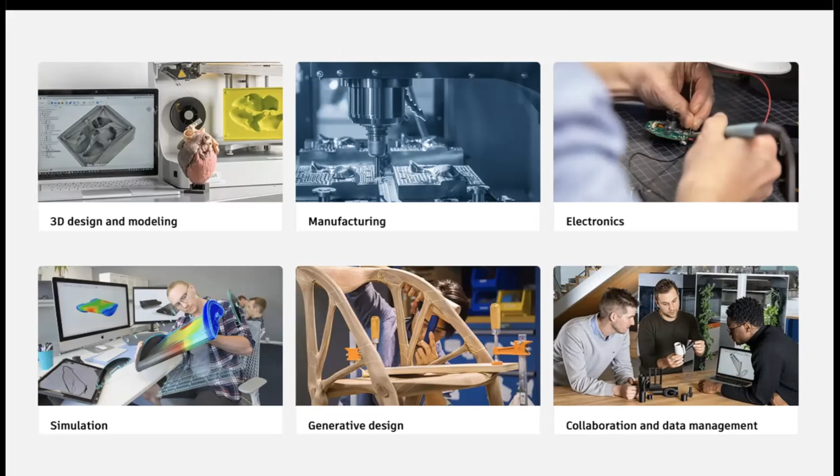And as we learned in our last webinar, you can even render, animate, and create 3D graphics that look hyper realistic. It's a really diverse program that allows students to do what's happening across industry, whether as an animator, creator, or model maker, bringing those resources into the classroom to let them engage with all of this in just one program. It really gives us a lot of options.

And what that means is your students can push their ideas into the real world. With all of these different tools at their disposal, their designs can really come to life, from circuit boards to 3D modeling, 3D printing, CNC milling, animations and graphics. It's a very diverse way for students to be creating, and I find personally as an educator that it really engages with a wide range of students, which is really cool.

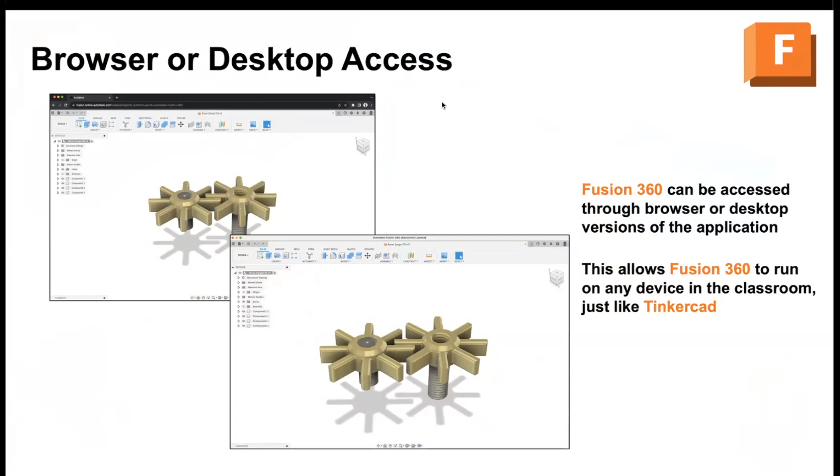Now, Fusion is accessible in two different ways. You can access it via a web-based app on pretty much any device, loading it in the web browser kind of like you would do with Tinkercad. Or you can also use it offline using a desktop app for Windows or Mac computers, which is really nice. So it's super accessible for students in whatever your classroom environment might look like.

To use Fusion, it is completely free for students and educators, but to gain access to it, you do need to create a free Autodesk account. Depending on where you are in the world, the age requirement for students might be different - usually 13 years old in the US, and that varies a bit based on your region. But creating accounts is completely free, and it gives all the premium and paid-for features to you for free, so your students can engage with the professional features that real designers and pros might be using in industry, right in the classroom.

There's also something called Fusion Teams, and this is kind of like making a class in Tinkercad where you can create a team, invite your students to it, and that's where they might share their work or submit work to a project that you could create. This is where students can share work between group members and collaborate on their designs. So this is a really great way that students and you can interact - you can see their designs and provide feedback, which is super cool as you look at their projects.

And I also just want to point out, especially if you're new to Fusion, that Fusion is infinitely customizable. You can change all the menus, all the ways you navigate. If you look at my Fusion screen later on, when I start projecting and sharing my screen, you might notice that my toolbar is different than yours. That's just because I've customized my tools and put things where I want them to be, and I'll show you how to do that when we dive in.

But if you're coming from Tinkercad, which I know so many educators and students are, I recommend that you go into the menu for Fusion, and you can even adjust the navigation tools like the mouse wheel, how you scroll, how you zoom, how you select things. You can make it mimic Tinkercad, so that students used to navigating Tinkercad can make Fusion feel more comfortable, which is a more intuitive and easy way to learn. Even as an educator, on the first day of introducing Fusion, I might set up our toolbar with the tools I know they'll be using, adjusting things to suit what we're doing in class so students can engage more successfully. The link for doing some of these things was just dropped in the chat for you to take a look at.

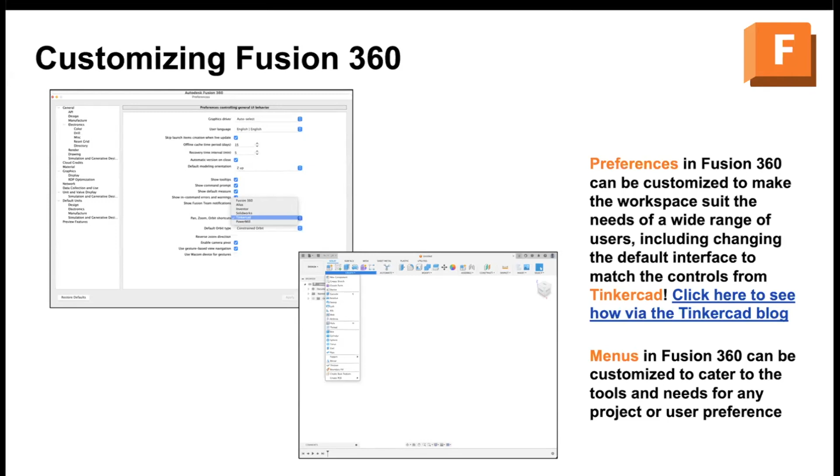So let's cover the basics, now specifically getting into tonight's topic about getting started with CNC. There are so many different things you can do, and this is such a wide topic that realistically in our time tonight we can only start to scratch the surface. My goal is for you to get a general understanding of what it is, the types of projects you might be doing with your students, the types of resources you might have or need, and of course how to use Fusion 360 to do these things.

So the first is let's cover some key terms: CAD versus CAM. CAD stands for computer aided design, and that's software focusing on the design of the product or part - what does it look like, how does it work. CAM stands for computer aided manufacturing, which focuses on manufacturing the product - how the part is actually made. Now, there are programs that are exclusively CAD.

For example, you can see I have some little icons here. Tinkercad is a CAD program where you design things, and Autodesk Inventor is another program in our suite where you would design things. Then there are programs that are CAM, where you take your design and prepare it for manufacturing. Fusion, as you can see, actually does both. We've covered this in previous webinars, and we have a link to get to all of our webinars and things like that.

On how to design in Fusion - we covered CAD and designing and things like that, and tonight we're really focusing on the CAM piece. How do you take your designs and bring them to life? There are some programs out there that are exclusively CAM, but one of Fusion's biggest benefits is that it's a one-stop shop where your students can do the entire design and production process in a single program.

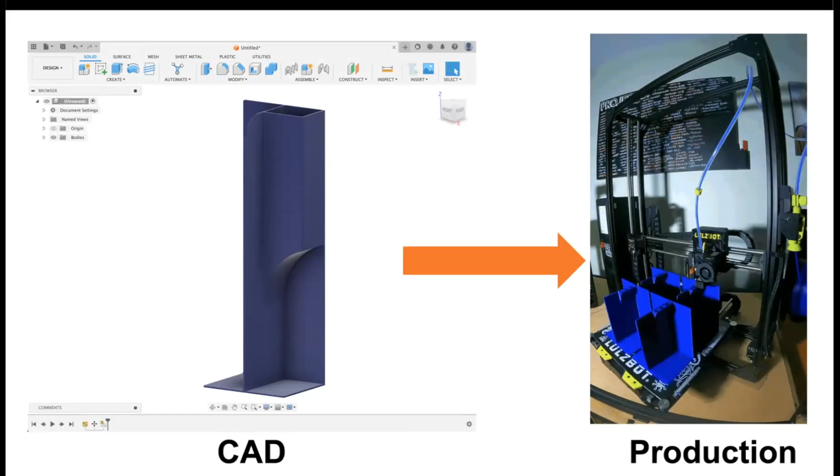The reason being, my 3D printer needs to know what is the quality. How quickly do I want to print this? What is the layer height, for example? How smooth do I want these parts to be? What material am I going to use? What plastic is this going to be in? What temperatures does it have to be at? I need to set all of those settings, and that is exactly what's done in CAM.

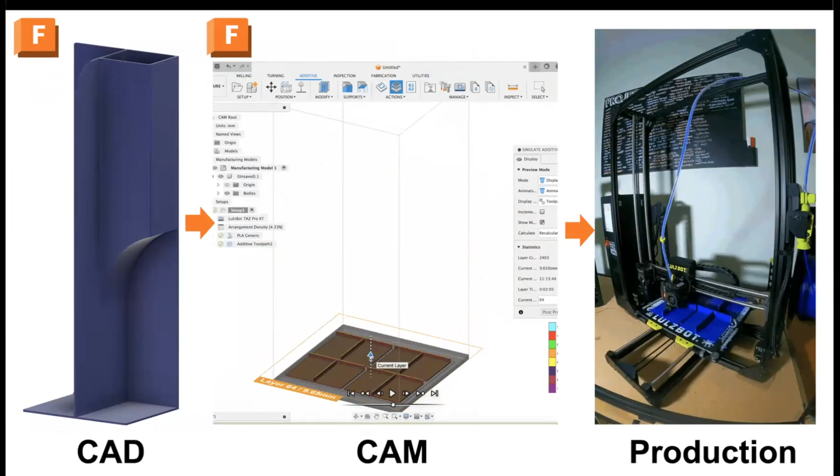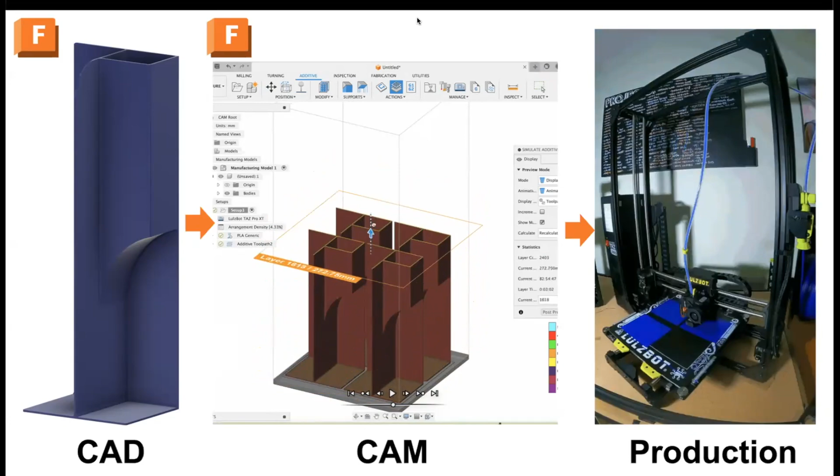So first I design something in CAD, then I drop it into CAM, and this is all happening in Fusion, in the same place. We did talk about this in a previous webinar called 3D Print Better, which you can go back and see if you're interested in learning more about the 3D printing world. In the CAM piece, that's where I say I'm using this plastic, I'm doing this quality, and then I send that file, usually a G-code or coded file, to my machine. In this case we're talking specifically about 3D printing, but the concept is pretty universal for any type of computer-based manufacturing, which we're going to talk a lot about tonight as we talk more about CNCs.

So that's where CAM comes into play. There's a lot of different types of manufacturing processes. 3D printers fall into the additive process group, where we are adding material. You start with nothing, and we're either melting a roll of filament, like in fused filament fabrication, or there's other types of 3D printers that use liquid resin, which actually uses a laser to harden the resin. We're adding material to create a model.

Another type of manufacturing process, more commonly associated with CNC production, is subtractive manufacturing, where you put in a block of material and then some type of cutting process - drilling, cutting, whatever it might be - will actually remove material. It machines it away and then creates your final parts. You can get very similar parts, arguably, depending on your machines, but the way the parts are made is kind of inverse - they're completely different.

Then there's a third type of process group, formative, where you might have a mold, pour hot plastic into it, remove the mold, and then you'd have your part. That is how most of our products that we buy are created. But additive and subtractive are not only used in industry, they're also still widely used in the prototyping method. For example, if I was going to mass produce something, I might use a formative method, but before I mass produce it and make my mold, I'm probably using additive or subtractive to make prototypes. I do want to point out that there are plenty of products actually made using purely additive and subtractive as well as formative.

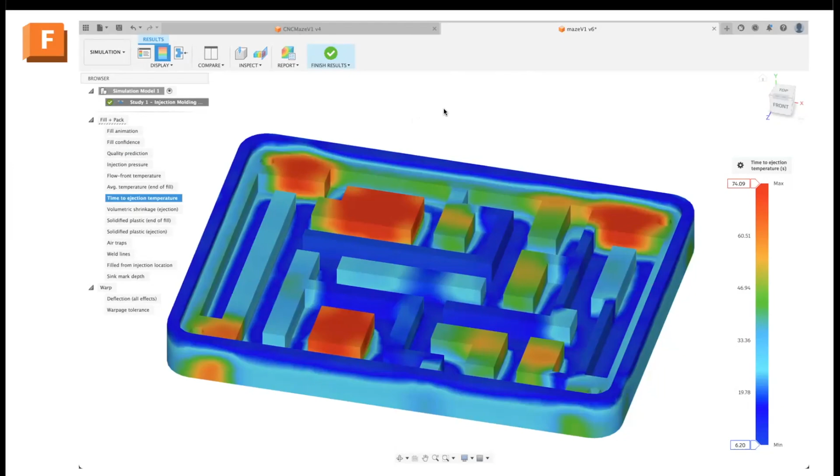So one program lets you work with all three of these typical manufacturing process groups. While we're not talking about all three tonight, it's important to know that they connect and relate. What we are talking about is CNC.

CNC stands for Computer Numerical Control. Essentially it's a machine whose movements are controlled by a computer process, usually some type of coded file, and that coded file is typically called G-code, the language it's written in. Way back in the day, people used to write this by hand, and you still can if you want to give it a go.

But CAM software will generate G-code for you based on the parameters you set. And CNC is really broad.

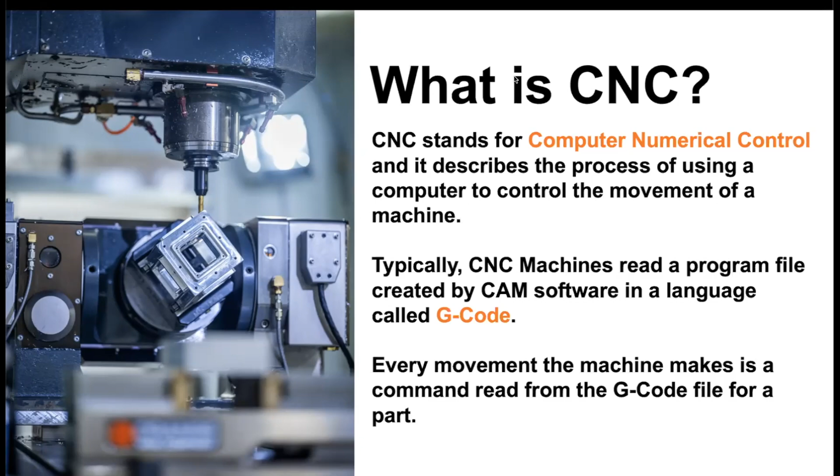However, it typically refers to these types of machines. So when somebody says I'm working with a CNC, they're usually talking about either a mill or a router, which uses a drilling process, or a drill bit spindle-like thing, that's used to carve away material. I'll be showing you visuals in a moment.

They might be referring to a lathe, which is a turning center, where something is rotating on a continuous axis, and then a blade is carving it away to make very symmetrical, cylindrical designs. Or there might be cutting machines like a laser cutter, a water jet cutter, or a plasma cutter.

These are usually the most common CNCs, but I want to make it super clear there are many more. 3D printers are technically classified as CNC machines, not that we usually refer to them as them, but they are. They run on G-code and computer numeric control, just like these machines. There's also a bunch of others used in industry like EDM machines and many other types of processes, but these are usually the most common when we say the word CNC.

Now, the first important tip before we dive into the design is to get to know the capabilities of the machine that you have. As a designer, and as you're teaching your students to design to be successful with CNC production, and right now I'm talking mostly about subtractive manufacturing with a milling or lathe or turning process, whatever it might be, we need to know what our machine can do.

So I might have this design, a very simple block with a little J on top, like an extruded J. Before I go to manufacture this, I need to consider the size of this model, the detail or resolution, like how sharp are my corners, how fine a detail am I trying to create, and what material. Do I want to make this out of wood? Do I want to make this out of metal? Does my machine have the capability to do that?

If I have a very small CNC mill, I know I can't put in a large sheet of plywood. And if my mill doesn't have, maybe, coolant or a spindle that can handle it, I might not be able to make this out of aluminum. So knowing those things and designing around those constraints about what your machine can do is important to understand as you want to become a more successful designer before we dive into the CAM process.

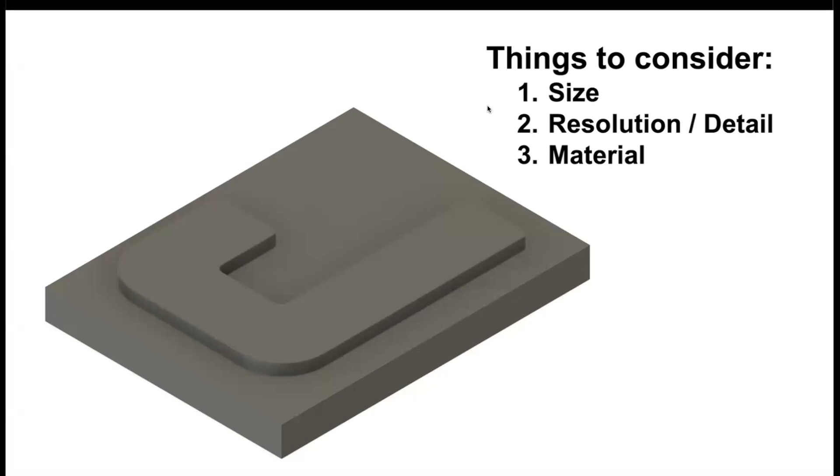But let's say that I set all these things correctly and I send this model to a typical CNC mill that can machine a lot of different materials. This in particular is wood, and it would use a drilling process to drill away or cut away this block of wood to give me my finished product. So it carves away, and you can see there's some sawdust in the background because it's shaving the material away to give me this finished product as I go. But your designs can vary, and what you need from your machines might vary as well.

And also the materials might be a consideration. If I want to get this fine detail out of a really hard material like metal, like making this out of solid aluminum or brass, I would need a machine that has enough rigidity to get that detail out of a harder material, where maybe a more entry-level machine could do something at this detail out of a softer material like wood or even epoxy or wax like this.

And now, because of this geometric challenge, I would also need a machine that can machine in a couple different axes. So what you're seeing here is not a lathe, this is called a fourth axis machine. It's actually rotating my block of material, this white block of material, which is a plastic, and it's then machining it away to actually create our model. So it's able to rotate and drill and create to give us that high detail of our part as we're machining. But if I didn't have a machine with a 4th axis or 5-axis configuration, something like this from a subtractive perspective would probably not be possible, at least without a lot of different steps.

And I keep mentioning axes and things like this, so what does that actually look like? I have this nice little graphic of typical configurations. There are other ones that I'm not showing you, but these are kind of the most common.

Let's say that you have a very simple CNC machine, like a laser cutter or a vinyl cutter that makes like decals and things like that. That is usually a 2-axis machine. The head of the laser can move side to side, which is usually X, and backwards and forwards, which is usually Y, and it moves around to cut out our stuff.

A 3D printer and most CNC machines that you would get for especially the hobby or entry level are 3-axis machines. So they can move side to side and backwards and forwards just like a laser can, but they also move up and down, and that's what gives us our Z dimension.

And now you might be thinking, okay, wait a minute, if I have a 3D design, like this Nefertiti logo or design I just showed you previously, don't I just need 3 axes to make 3D parts? Well, when we have CNC parts and we're drilling and cutting and machining, we might need to rotate our part to get to different angles depending on the types of designs. So what a 4th axis machine does, and what I showed you previously with the Nefertiti, is in addition to being able to move side to side, backwards, and also up and down, it can rotate the material to really get it from almost any angle.

And the next step above that, that would even be more precise and give us even more flexibility, would be a 5-axis machine, which would be able to rotate the model this way around and then also this way and around. Or it actually might just rotate the head, like the cutting head could actually move and rotate, almost as if the drilling head on a mill is on a robotic arm that can rotate around.

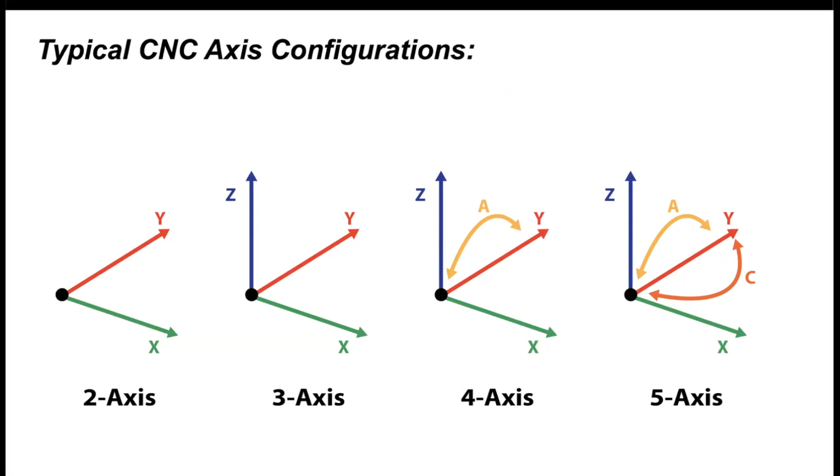Now, could you make something like this without a 5-axis machine? The answer is yes. With a typical 3-axis machine, I might put in my block of aluminum and machine the top of the block. Then I physically remove the block, rotate it, and do the next side. I might rotate this block 5 or 6 times to do all the sides, whereas a 5-axis machine, in theory, would be able to rotate all the way around autonomously.

From a production standpoint, if I want to mass produce these, I don't want to have to babysit the machine and rotate the part around every so often to machine the sides. I'd want my machine to do as much as possible. But from a hobby and education side, there are a lot of different things you can do. It's just a matter of getting to know your machines before you dive in.

So this is just a background on CNC machines, because I'm about to show you a lot of features for production in Fusion. If we didn't cover some of these definitions, maybe it wouldn't click. Hopefully that was helpful for you.

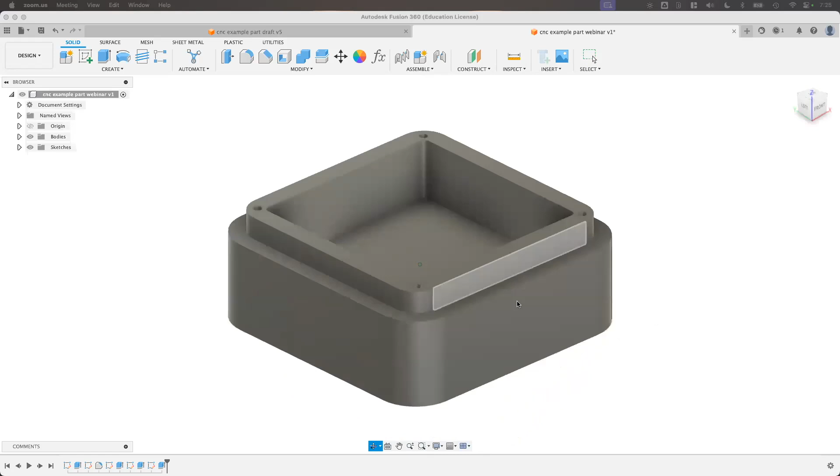I have a part that I've designed previously, just a 3D model. In previous webinars, which we did drop into the chat, we talk about how can you design things, how can you import designs from Tinkercad. Lots of great resources that I urge you to check out if you're just getting started with the design piece. But this is a very simple little box. I think I'm designing this as half of a mold where another piece might fit on top.

I want to machine this out of solid aluminum. I know my machine can do that, I know my CNC available can do that. So what I want to do is switch to the manufacture tab right here. The design doesn't change, but our toolbar does, and we see many different processes.

The first tab is for milling, using a CNC mill or CNC router, which is the drill bit type machine I've been demonstrating thus far. However, you could switch to turning if you were using a CNC lathe, or additive if you're using a 3D printer. Inspection, if your machine is equipped with it, you could use something like a probing tool to measure and do quality control inspections on your parts. Under fabrication, you can get into cutting through laser, water, etc. I'm going to go back to milling because that's the most appropriate way to make this part. But everything I'm showing you is very similar for any of these processes - the steps might be slightly different for the type of machine, but the actual setup side is very much the same.

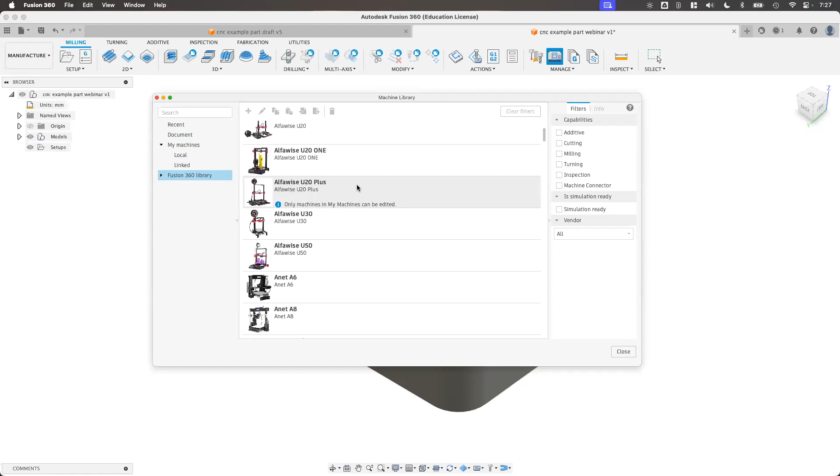The first thing we need to do is make sure we have our machine in Fusion. So I'm going to open up my machine library. I have a number of machines, these are ones that I own. I use my Makera Carvera, and we can see that I have both a 3-axis configuration and 4th-axis configuration, and I imported this machine. You can add machines to Fusion, but Fusion also has a pretty extensive library of 3D printers, mills, routers, lathes, lasers - a really extensive library you can browse, and there's a pretty good chance your machine is already in here.

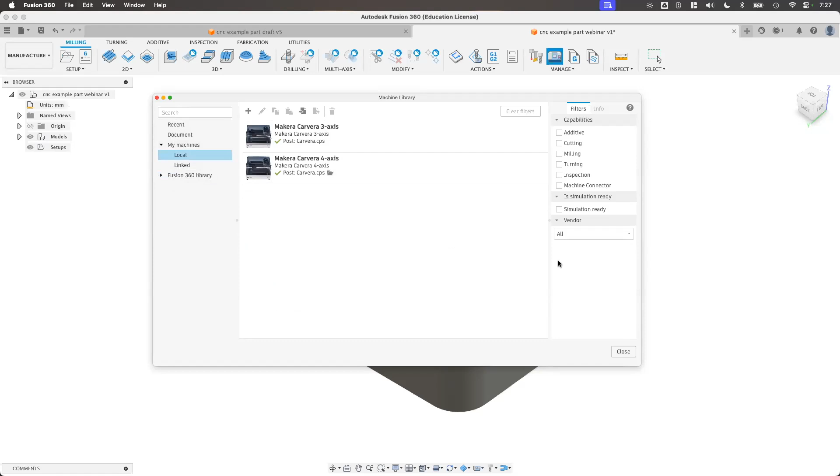And if it's not, you can create your own custom machine. If you want to DIY, you can design and create your own custom machine, or you can import a specific library and profile from another manufacturer that's compatible with Fusion, which is a really wide and extensive list.

So I have my machine, which is great. I can also open up my tool library. Tools describe the bits, the cutting tools. You might have drill bits if it's a milling process, or blades and things like that if you're using a turning process.

There's an extensive Fusion 360 library with tons of different bits for you to pull from. You can even see cutting tools for working with plasma, laser, water jet, all of these different things. You can import libraries too—a lot of vendors that sell tools will give you a library that you can import, so that whole library is importable.

You can also create your own tool. If you buy your own bits and want to make a tool, it's super easy to click this little plus button, choose what type of tool you're adding, and add the different parameters. Most of those parameters are provided by the manufacturer, so you don't need to become an expert on these things to get started. A lot of it is provided for you, but one of the most common mistakes we make when first getting started with CNC is choosing the wrong type of tool.

Or setting our speeds wrong—for example, trying to cut aluminum too slowly or too quickly, I might snap my bit. So having those speeds correct matters. If I click on some of these, you'll see profiles down here. This bit is available for hardwood, plastic, softwood, or epoxy. I personally didn't set that—those speeds were already set by the manufacturer of this tool, which is really cool. You can also find a lot of great resources on why speeds and feeds should be what they are, all over our different guides and tutorials.

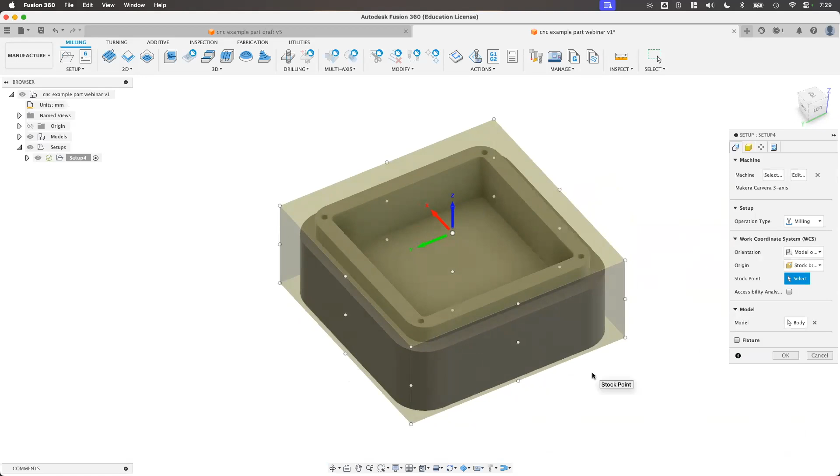The first thing I might want to do is set my origin—where my 0,0, my origin, is going to be. This might vary a little from machine to machine, but I think most machines have the origin in the front left corner, so I click on the front left corner here to set my origin point.

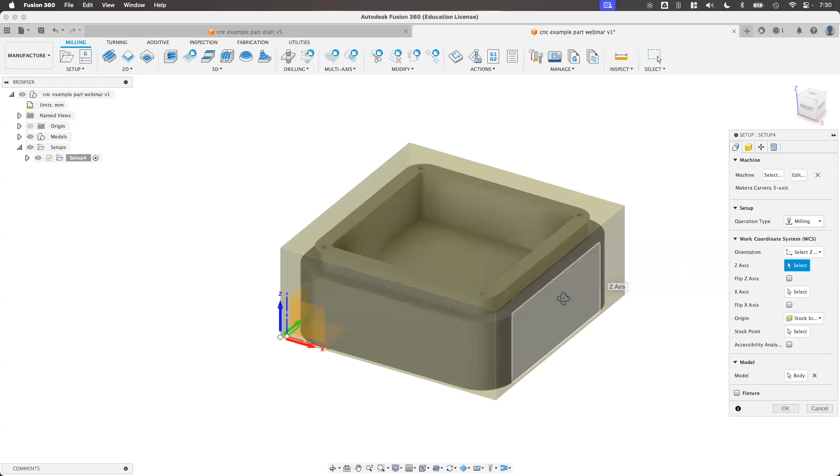This is also where we want to confirm the axis is correct. My machine has X go to the right, Y go to the back, and Z go up, but there are other machines with different axes. Right here in setup, this is where we can actually rotate—for example, if I had a machine that uses a vertical process, I could flip my axes around, or change where my origin point might be if I designed it one way and my machine is another way. This is a pretty standard configuration that most mills would use, but you can always adjust things here in the setup.

I want to make sure I have my model selected, so I've selected the body—it actually does that by default, but you might have multiple parts, so you might only want to select one. Then we want to go to the stock tab. The stock is the material we're going to machine from, so my solid block of aluminum or wood or whatever, that is my stock.

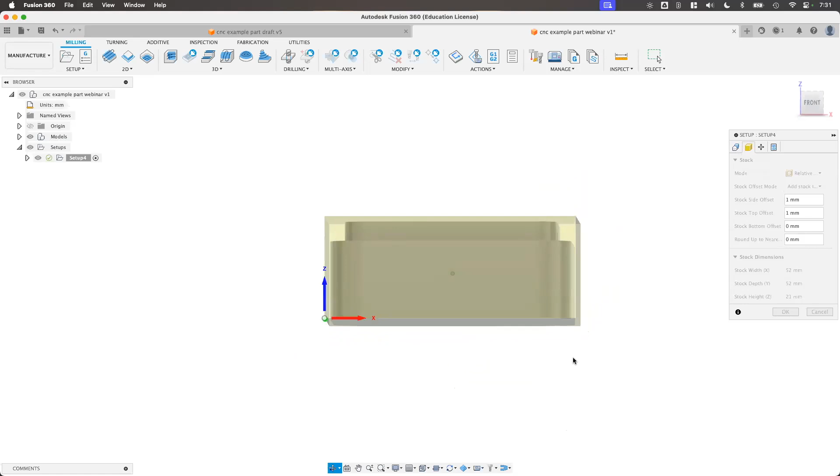What Fusion does by default is make a relative stock—just a little bit bigger than your model so you can see the cutting process. What I like to recommend, especially for folks teaching people getting started, is to actually set the stock to be the size of the material you're actually working with.

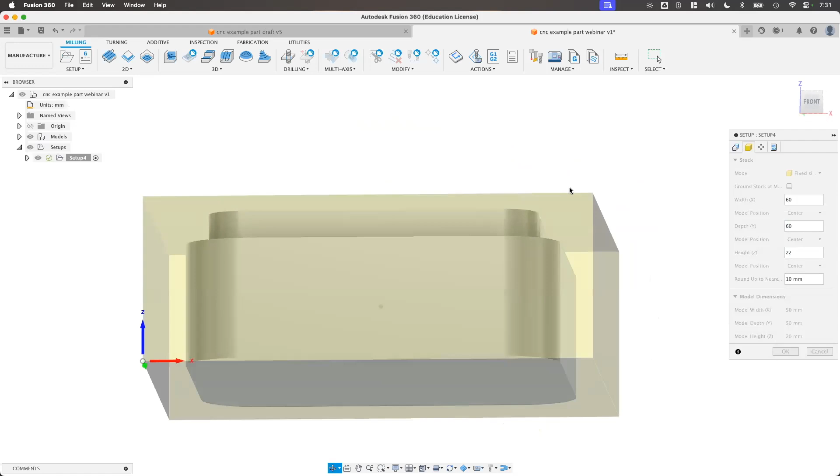I'm going to make this part out of a piece of aluminum, which is 60 millimeters by 60 millimeters by 22 millimeters. Now, interestingly, my part is only 20 millimeters tall, so I have a little bit of stock on both the top and the bottom, which is pretty common. The odds of you finding stock that's perfectly the same thickness as your part varies based on your project. So my stock is a little bit thicker than my part, which is more than fine.

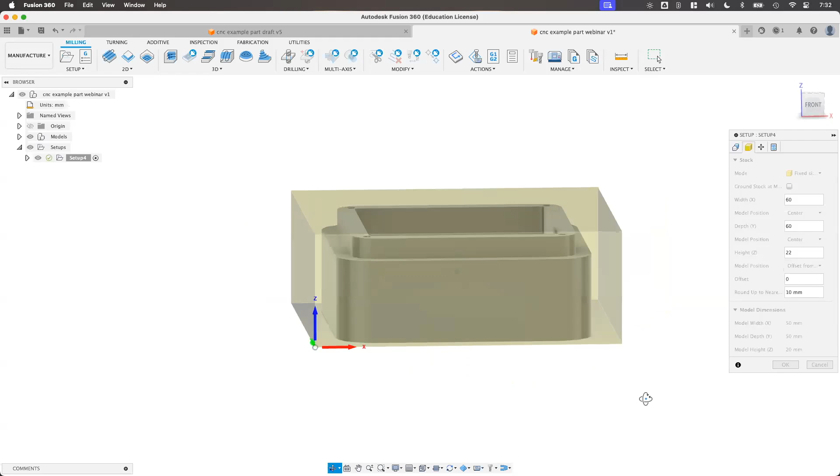But I want to actually move my part so it's along the bottom, so that way I don't have to machine the bottom, I can just machine the top. So I'm going to offset my part from the bottom by zero. Now we can see if I look at this from the front, the bottom is perfectly flush with my stock. I have a little bit of excess stock on the sides, and a little bit of excess stock on the top, and we're going to machine all of that away to create our model.

Now, there's other things you can adjust here. Like, for example, if you want to attach this to a vise or change where the part's fixed, you can get into this, but this is more of an optional feature. You can also adjust your post-processing settings here. We'll talk more about this a little bit later on.

The most important thing to know is that nothing is saved until we press OK. So now that I pressed OK, my setup is saved. And I can always go back and change something by double-clicking on it in my browser. Or instead of double-clicking, you can also right-click on it and hit Edit. So you can always go back and change things, but you want to make sure you press OK to save your changes every time.

So we've set up this job. We have our stock, we selected our machine, we know where our origin points are. Now we have to get into actually machining this.

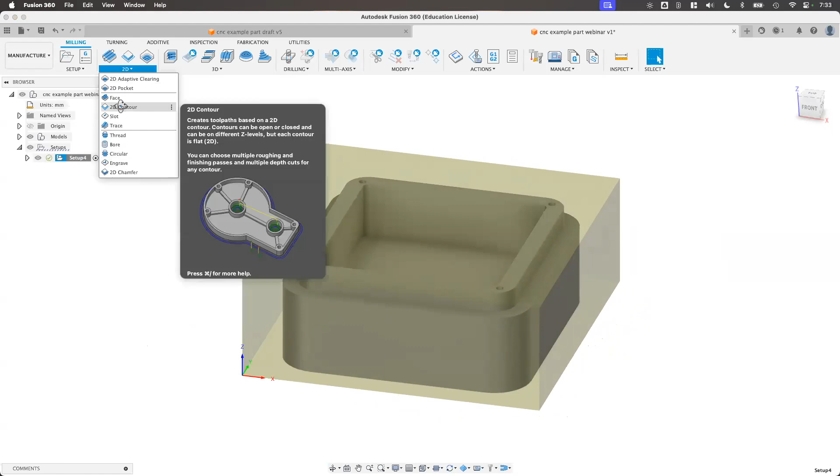I just want to point out there are so many different processes that you can pick from: 2D processes, which are your typical engravings, creating 3D figures and parts and perfect spheres. This would be like making a Nefertiti type thing I showed you versus drilling. I'm going to show you a lot of these, but certainly not all of them. The nice thing is all of them give you a nice little description about what they do, and there's lots of great Autodesk resources to help you get it.

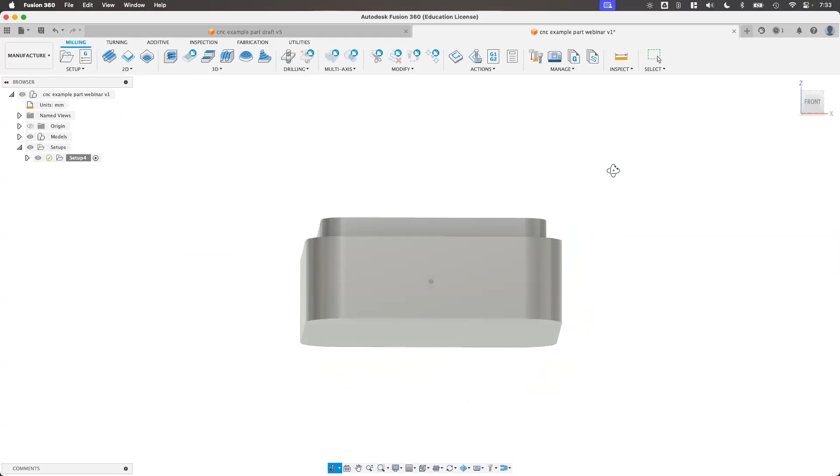The first thing we need to do is surface, or remove the face. As we learned, there's a little bit of excess material here at the top, and I have to machine this down to the actual thickness of my model. This is really good practice because if you buy rough stock, a rough piece of wood, even aluminum that's extruded or something, the top is probably not perfectly smooth. So if you want a perfectly smooth part, you should really machine it to be so.

So we're going to use this face feature. I clicked on face, and now I have a toolpath window, and this is where I set everything. The first thing I want to do is grab the bit, and different bits can be used. I'm going to go to my tools, and I know that I have a surfacing bit right here. Again, I already have this in my library, but you could browse existing bits and existing tools.

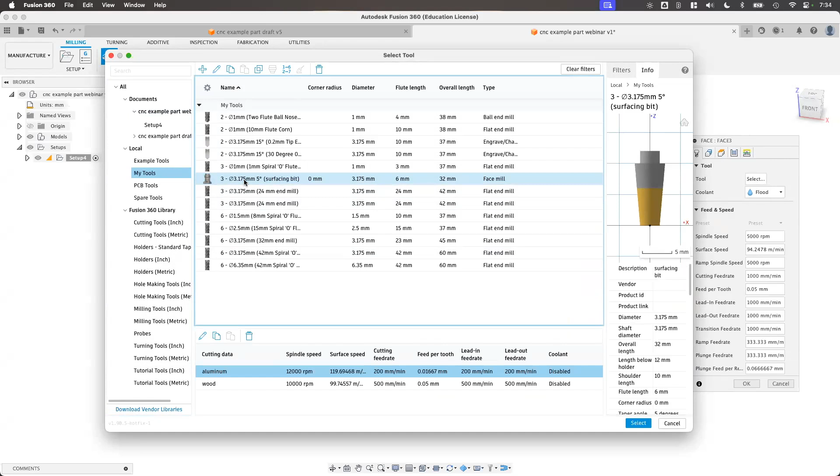Let's say there's a tool that you use frequently from your Fusion library, which is where I got this from. You can then add tools by just organizing things. Right now it's showing me that I can only see surfacing tools, which is why a bunch of things are being hidden, which is fine. But I can actually grab tools and add them to my library, move tools from one library to the other, and edit tools and things like that. So you can really customize this to literally be your toolbox and match what you have. I recommend you put some time into doing that, and you'll adapt it as you go.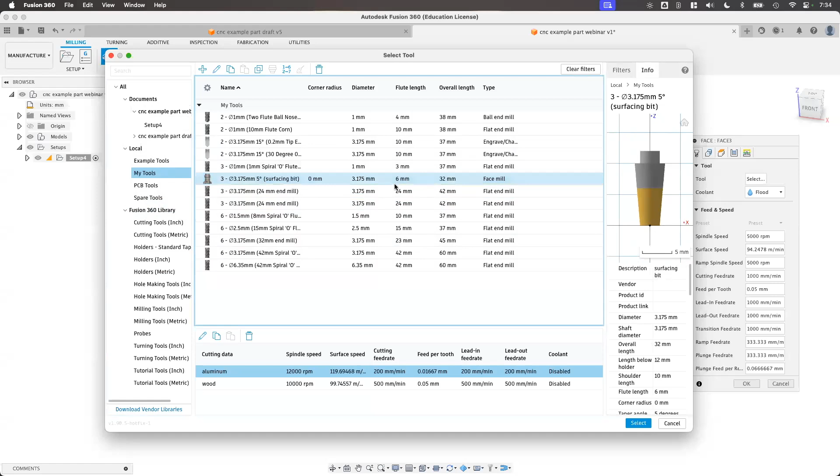So here's my surfacing bit. I'm going to select it. The settings are usually pretty good by default. They might not be the best settings for the fastest machining process, and they might not be the best settings for the most detailed and smoothest result.

You might want to refine things as you get into the concepts of high detail and production, but they're a fantastic starting point. And I have 2 presets for this: aluminum or wood, although I could also create a custom preset, but I have default feeds and speeds and things like that.

In general, the harder the material, the faster your spindle speed's going to be. You're going to want to cut at a faster rate, and your movement, your cutting feed would be slower. So the harder the material, your spindle's probably faster and your movement is probably slower. The softer the material, you don't have to run your spindle as fast, and you can move a little bit faster. So the softer the material, the quicker we can machine it. That makes perfect sense, right? Cutting wood is far easier than cutting aluminum.

And again, a lot of these are set as the default. And if I click on these little sidebars, we can see that Fusion actually gives you some calculations because a lot of these speeds are calculated based on your tool diameter. So the diameter of your tool will actually equal how fast it can go as well as how deep you can cut. It's a lot of math, but it's something that you can see and something that Fusion automatically calculates for you, which is really, really great.

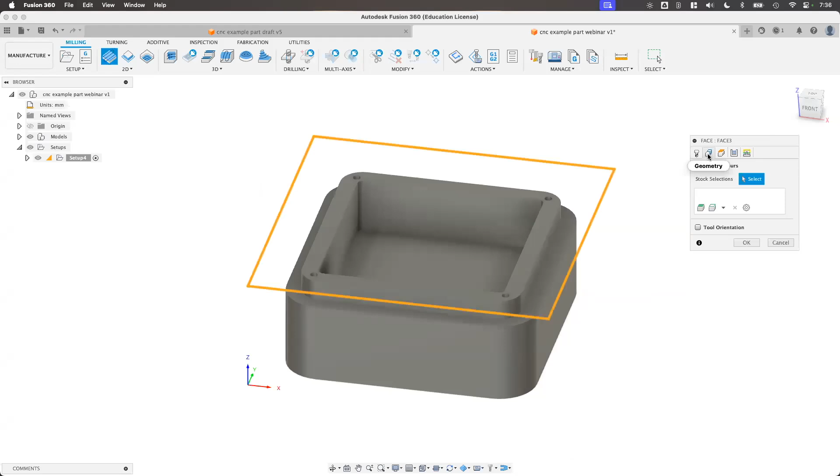So we've selected our tool. I'm not going to change any of my default settings right now. I'm going to go to geometry and I need to select where do I want to machine. And we can see that it's actually machining the surface of my block. This was default, and we will have to select things differently with different tools, but the surfacing, the facing is automatically selected, which is great.

So then I go to heights, and this is where it gets a little confusing. I need you to imagine that we have a CNC mill right now. The first height that we want to worry about is the clearance height. So at what height is there no obstruction for our mill to crash?

Because that's a mistake. Let's imagine that I clamp my aluminum down. I put clamps on the side to hold it down. I don't want my mill to crash into my clamp, right? That would be bad. So I want to set the height where no clamps will be. And we can see all the way up here, this Z clearance, 37 millimeters above, which is offset from our retract height, is way above our part. There's no way I'm going to have any clamps up there, which is cool.

Retract height is where the bit lifts up to before it moves. So again, we want to make sure it's above our clamps. And I'm going to leave this all as the default for now.

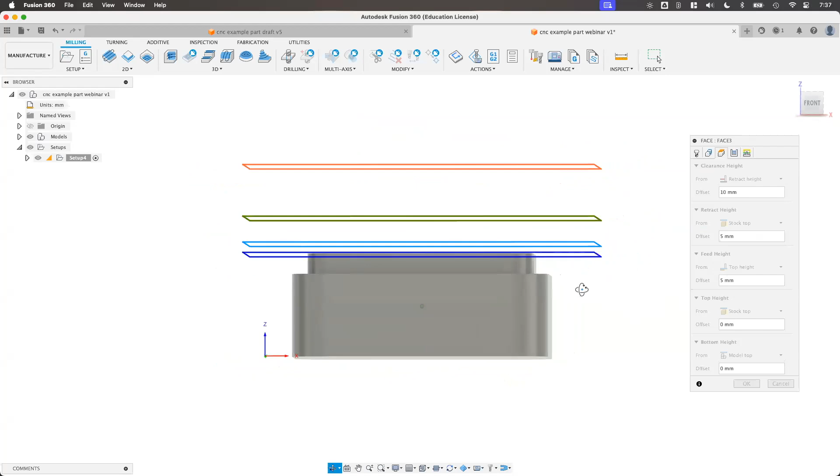The feed height is where does it feed from? So that's the top of my material, right? So my feed height right here, okay, this light blue is offset from the top of my material. So it starts feeding and it starts cutting just before we get into the material.

And I want you to think about it for a second. The last thing we want to do is touch our bit to the material and then turn it on. We don't want to do that. If you've ever used the drill press before, we know that we turn on the drill press and then we slowly lower it into the stock. The same would be for your mill. You want it to turn on before it starts to cut, and that's exactly what the feed height is. It starts to turn on 5 millimeters above, and you can adjust all these offsets, but I find that the defaults usually work okay, but we'll adjust some of them later on.

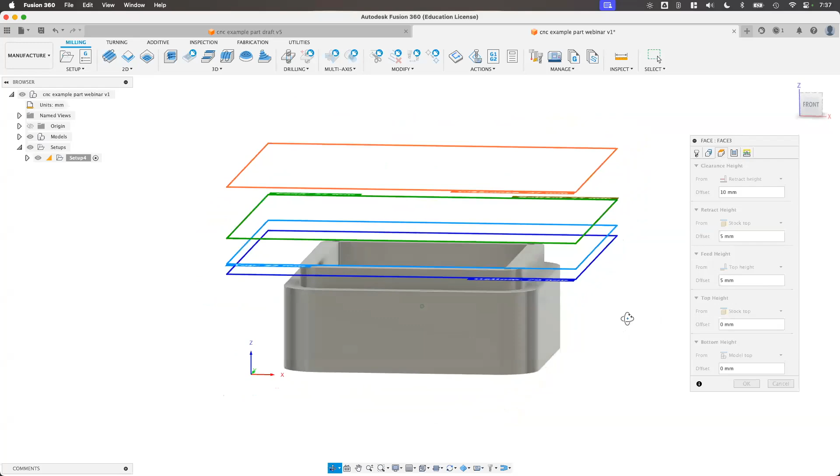The top height would be the top of my material, the top of the block of aluminum, 22 millimeters. And the bottom height is the top of my model, right? So I'm going to machine up to my model. So we have all these blue boxes. It's a little confusing at first, but it's all talking about where the machine goes. And the nice thing is in a moment, we're going to simulate the machine to see how these actually work.

So bear with me for one more second because we're going to go to the passes tab. Now we can dive into really, really deep concepts about pass direction, cutting direction. Can you cut in 2 different directions and things like that? Fusion will automatically make the best decisions based on your milling process. And I say the best, I mean, the most likely to be successful.

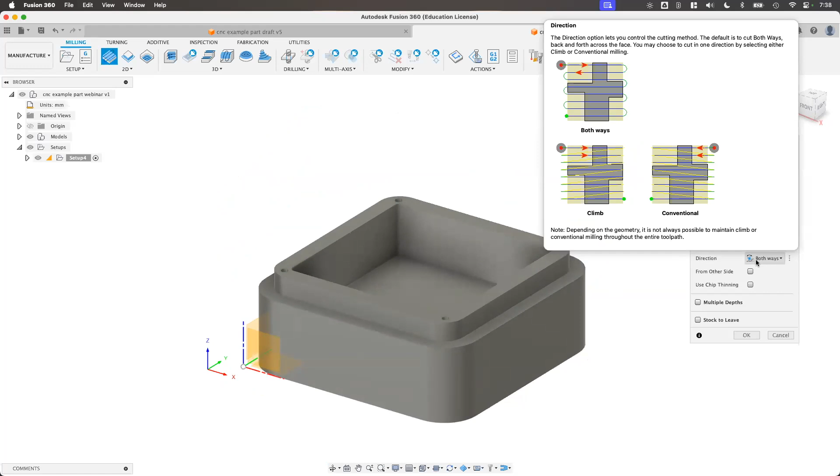Again, it's not going to know all the little details of your machines, so you might have to fine tune things depending on what you're trying to push it to, but it's going to have a really great starting point.

One thing you're going to want to turn on almost all the time is multiple depths. Instead of trying to surface this in a single pass, let's do this gradually. The deeper you're trying to go, 2 millimeters isn't that much, but let's say I want to shave off 15 millimeters. If I try to just plunge my bit 15 millimeters into solid aluminum, I would shatter and crack my bit.

So multiple depths allow us to cut things gradually in multiple steps. I can see I have a default step down. Fusion, using the length and diameter of the bit, will automatically calculate what the most optimal step down would probably be for your bit, which is really cool. We can see that reduces it to 3.175, or give or take 1/8 of an inch, which is really nice.

Some other things, like if you want to flip it over or do finishing step downs, you can tweak it. I do want to use even step down, so it'll divide this number evenly across my distance. I like doing that, so I know every pass will be even and I won't accidentally do one that's a little bit more than the other. I find that gives me a smoother, more even machining surface.

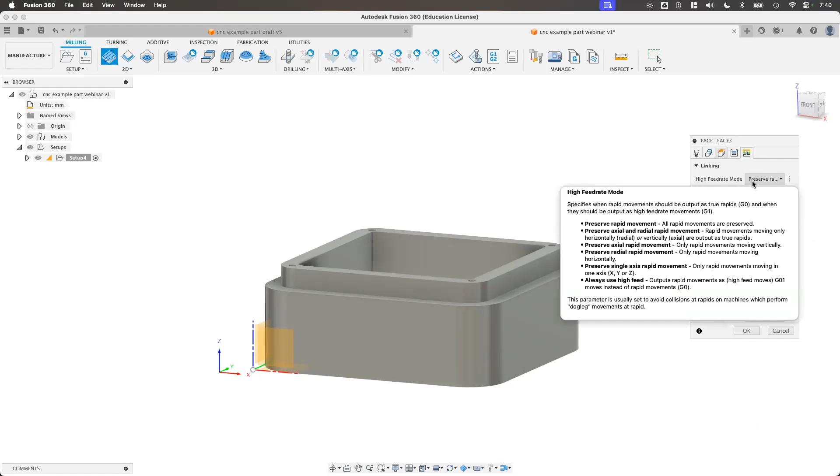Stock to leave would be if we wanted to make multiple passes with multiple tools - we'll get into that in a little bit. And then linking, I usually don't change these things. This is how it actually connects different paths, and I usually like to keep this as the default. I can't say I'm expert enough to dive into all the nitty-gritty of these things, but Fusion, as you've probably seen, gives you really nice details when you hover over everything. I find that for most typical simple projects, the defaults are really going to set you right.

So I press OK, and what happens is I see a little simulation. I can see my tool bit, I can see my paths. What I want to do is hit the Actions tab and then hit Simulate. I can actually play this and we can see - let me slow that down. That was very fast, let me slow this down here.

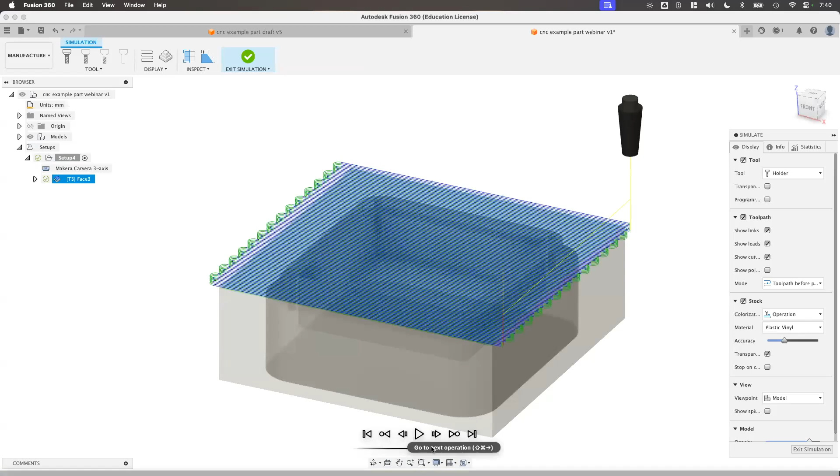You can actually see your bit plunging into the material. Maybe I slowed it down a little too much, but it plunges into the material and we can see exactly what it's going to do. We can see all the cuts, all the passes. I can zoom in here and confirm that my process is going to be correct. This is an incredibly important step as you're designing these things - we really need to make sure we're not cutting in the wrong place, that we're not actually cutting off more material. So simulation is a hugely important step.

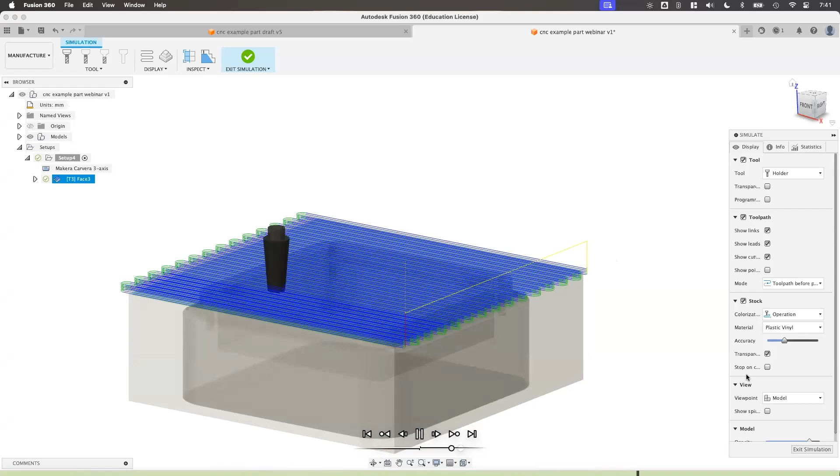This will also simulate and tell you roughly how long it's going to take, and how far it's going to machine and things like that as well. That will, of course, vary based on your bits, your speeds, your feeds, and your materials. So I'm going to click Exit Simulation. That looks good - we've machined the surface.

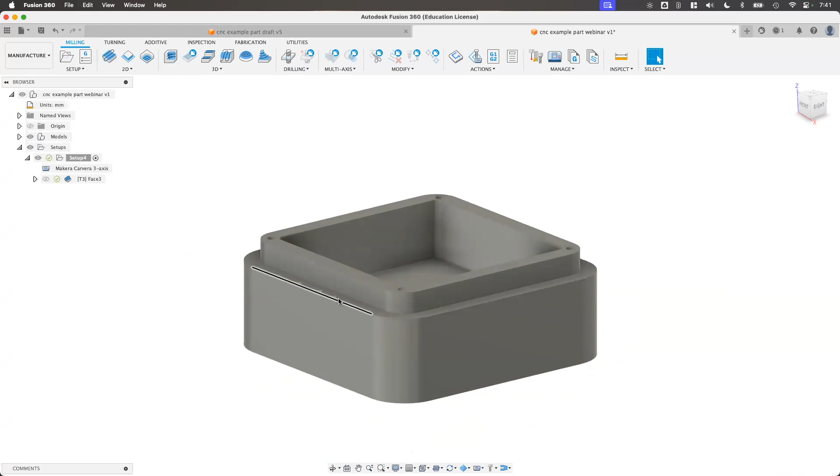Now the next thing I want to do is machine this outer edge, this outer lip. Whenever you choose your tool path, you usually work from least detail to most detail, or from outer to inner. So the top, then the outer part and the inner part, working my way down to the finished process. I'm going to use a 2D contour, which is the path we're going to use, because when I hover over it, the picture looks like exactly what I want to do.

I'm going to go and change my tool. I don't want to use a surfacing tool, but switch to maybe a typical cutting tool, like an end mill is usually what they're called. Again, I'm working with aluminum, and I'm not going to get into changing these settings - I'm going to keep my default settings. But under geometry, what I need to do is select the path.

Because this is just a single line, we're going to select what's called a chain. So I'm going to select this chain here, and we can see that I just selected this line. I don't really need to worry about any of these other things right now.

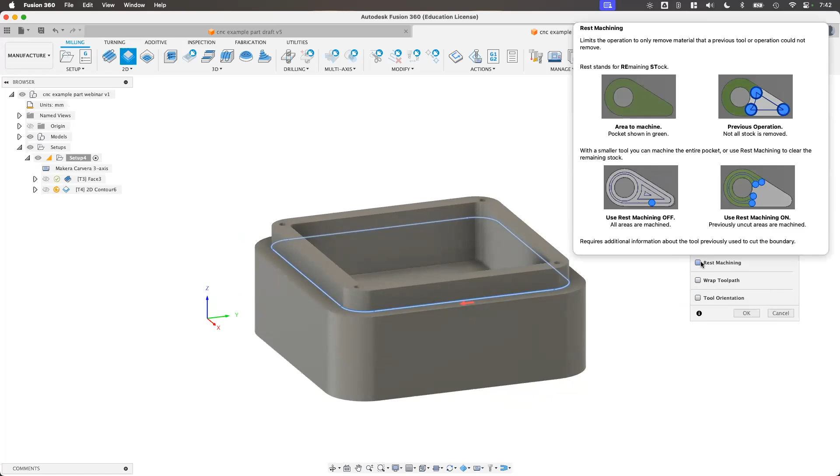We'll talk about tabs in a little bit. Rest machining is, let's say you want to do multiple passes, like a big bit for a roughing pass and then a little bit for a detailed pass. That's a great feature if your bits don't fit in your pockets. Wrapping tool paths is more for a turning process. I recommend you spend time reading through all these things, but tonight we're really talking about the standard things you need to know to be successful.

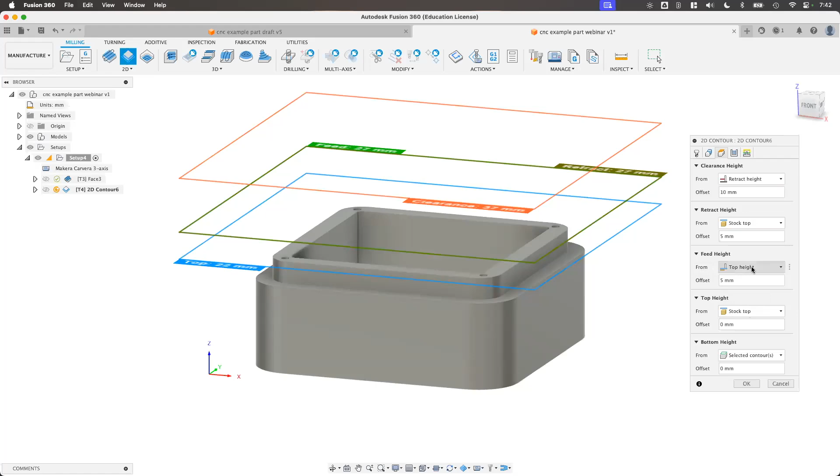So we have our chain. I go to my heights - I have my clearance height, my retract, my feed height, my top height. Here's something interesting: the top height was set to the stock top, which is the top of my aluminum. But we now know that we just machined the top of the aluminum away. So instead of setting that to the stock top, I'm going to set it to the model top, because we just machined the top of the aluminum away. So now I'm basing this off of the model's height.

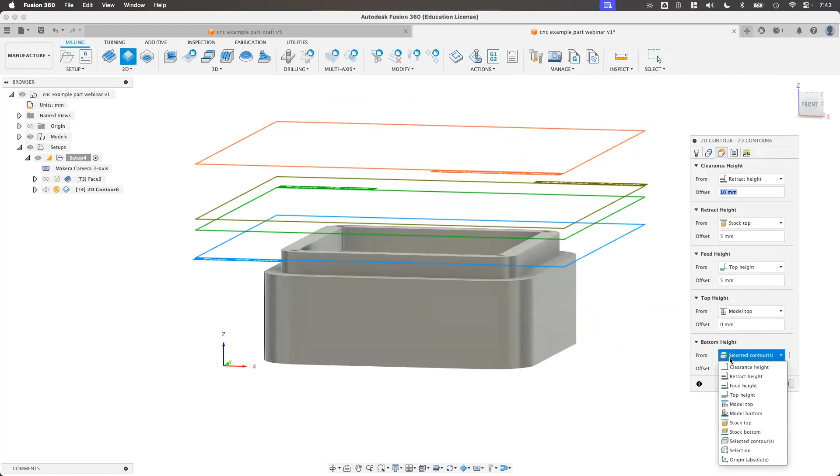And then the bottom height, where do we want to machine to? I'm going to say selection, and I want to machine to this lip. So this is where I'm going to machine to. We'll go to passes. I'm not going to change anything with default settings other than our multiple depths. I definitely want to enable multiple depths, and I'm going to use the default step downs and things like this.

Finishing passes are kind of interesting. A finishing pass will give you a cleaner cut. It does it much slower, and goes back and forth to give you a nice clean finish. You can either do finishing passes the whole way, or only at the final. The benefit of the final is it saves you time, gives you a nice smooth finish, and usually reduces the lines or marks along the wall. So if you're going deeper like this, I usually recommend finishing just at the final.

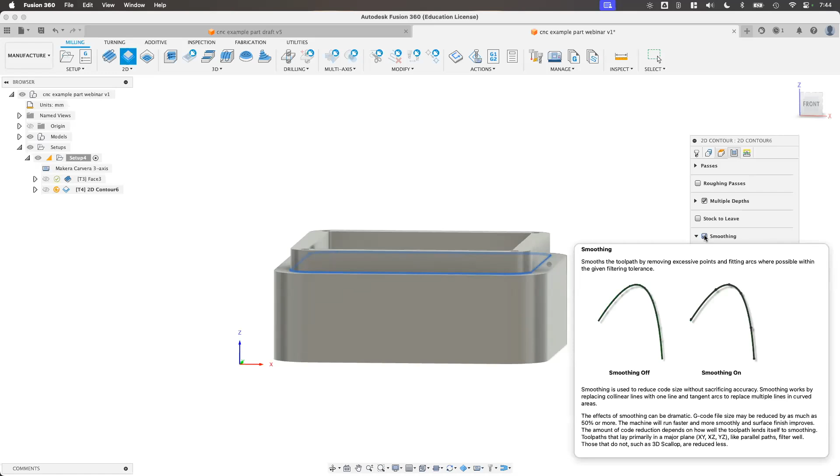I'm again going to enable even step downs. And then there's a couple things I really love to do. Feed optimization is one of Fusion's fantastic features - it's automatically going to look at your path and give you the best routes to reduce the load and stress on your bits, to make them stay sharper and live longer. And smoothing is also great - if you have a weird path or curve, like if you imported a mesh, it simplifies the path to reduce your file size and how long it takes.

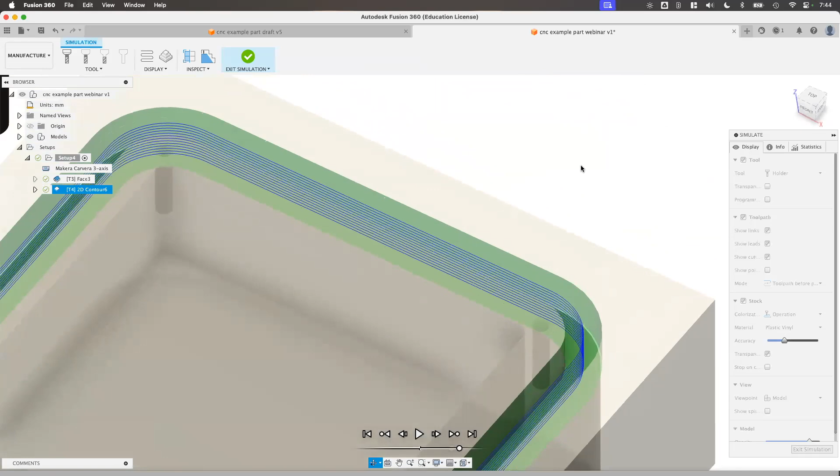Awesome features. I'm going to press OK. And now we can see we have this pocket. Let's go simulate this - I'm going to speed this up a little bit. So we can see my bit enters, does this outer perimeter, and machines the pocket of my part. Fantastic, we're doing great.

So next thing I want to do is this inner hole, this inner cavity, this inner pocket here. I'm going to use the 2D pocket. Again, I talk about your toolbar - I use the pocket tool a lot. If there was another tool I used here, let's say threading, I make threads a lot, I might hit this little toolbar button and pin this to my toolbar. That's how you can customize your toolbar so the tools you want are always there.

So let's click pocket. Now this pocket's a little deep, so I need a much longer bit. I'm going to go to my tools, and I think I have one here - let's see, I think this is the one I want. I have a nice long bit, I'm looking at my lengths - here we go, a nice 42 millimeter cutting bit, which is great, nice and long, exactly what I want. We'll also notice that's a little bit bigger, so it's 6.35 millimeters in diameter. I'm going to switch this to aluminum so I get my feeds and speeds for the metal I'm working with.

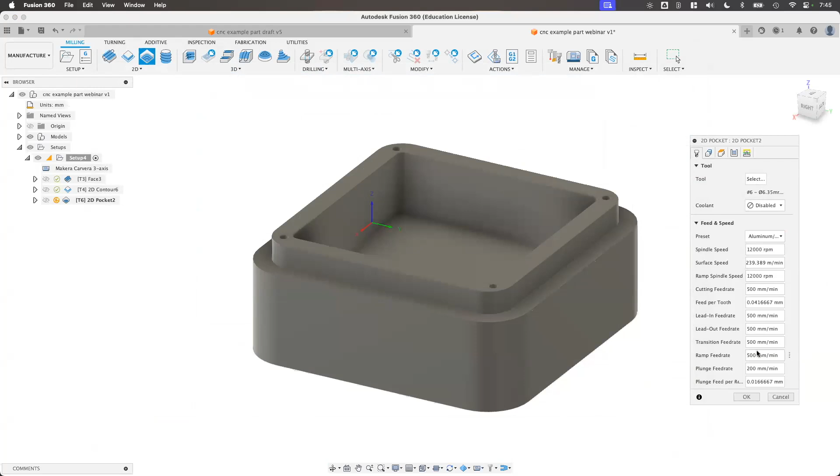I also want to point out that my machine doesn't use liquid coolant, it uses air coolant. The Carvera uses air, though I don't need it for this project. Some of your machines might use liquid coolant if you're cutting metal, and you can enable all of those things depending on what your machine can and can't do. I typically turn on an air line manually, so I don't need to program that. But there's many, many features, and this is why knowing your machine a little bit before we get to the stage is very helpful.

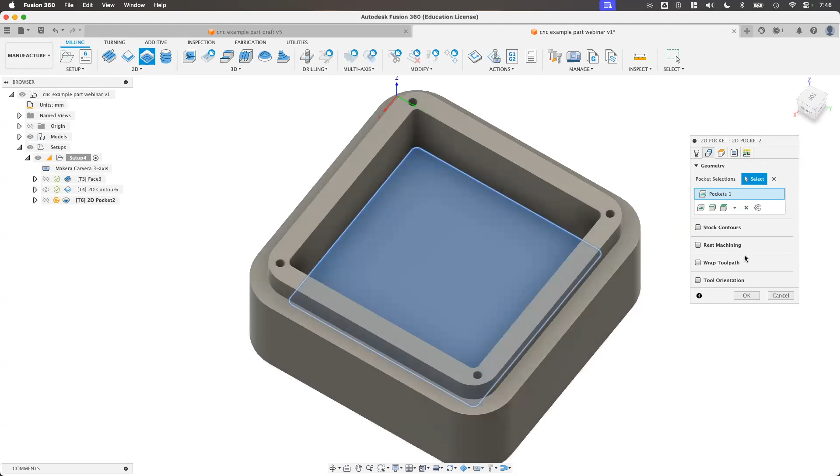So then I'm going to select my pocket like this. I'm not really worried about any of my other features right now. For my heights, I'm going to set it just like before, where we're working from our model top, not our stock top, because we've already machined the top of the stock off. And I'm going to select the bottom of my pocket, so this is where I'm going to machine to.

For the passes, same as before, multiple depths using the default settings are more than fine, even step downs. I'm not worried about finishing passes for this, it's not important for this product, but I don't want to enable stock to leave - I want to machine all the way to the bottom. I'm not really worried about leaving a buffer stock, we'll talk about that in a moment. But I do want to enable smoothing and feed optimization. So I press OK.

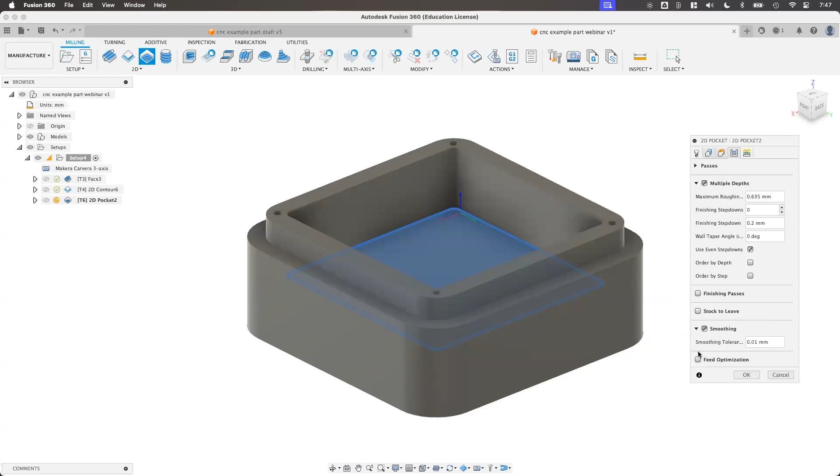This is the most complicated one that we've done. So we have our pocket. Now this looks potentially correct, right? And I can simulate this, and this looks, I think, fine. But we have a minor issue here - look at this simulation, I'll let it finish.

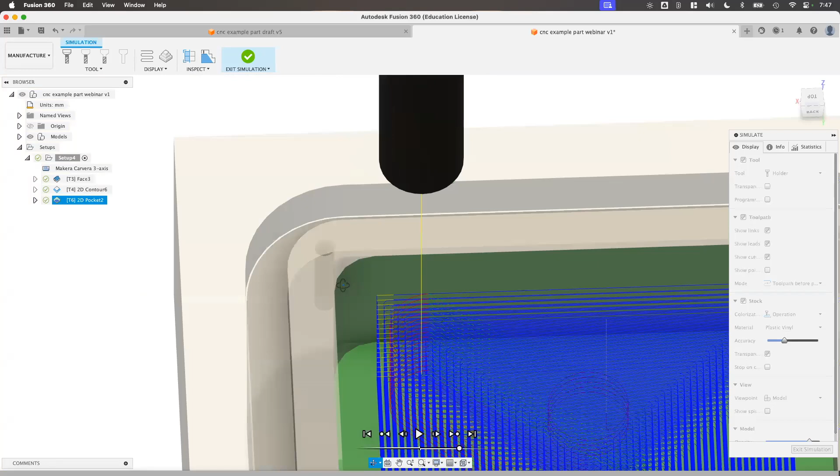Notice here, it's hard to see maybe, this is the corner diameter I wanted in my design, but this is the diameter that Fusion gave me. Why is that? It's because this 6.35 millimeter bit doesn't fit into my corner. It'll machine the pocket, but I need to look at my design and say, you know what, that's not going to where I need it to go.

So you have a couple options here. I could machine this first with this big bit, which will clear out material very quickly, and then I could make a second pocket or a contour to then just do the outer perimeter to clear away the excess material. Or I could just switch to a smaller bit - it depends on what you have available. If you only have smaller bits, that's probably your best option.

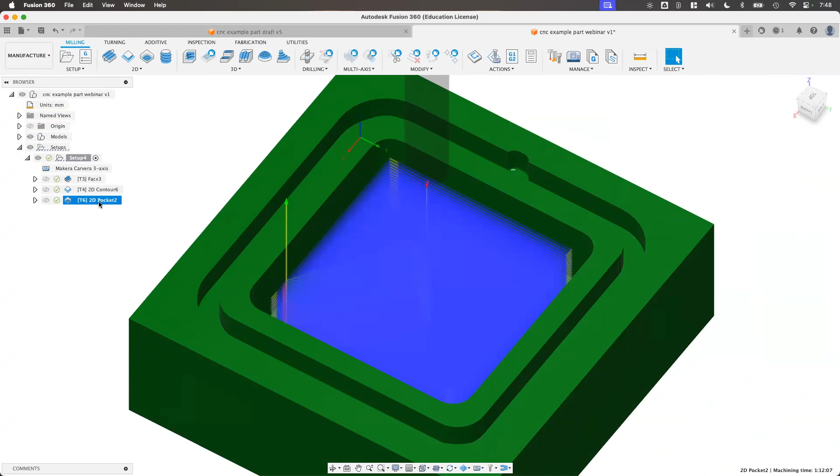If you want to do multiple passes, I could actually create a contour. Let's select that nice long bit that we talked about before, but this one's only 3.175, so it's a much smaller bit. I'm going to say aluminum, and I'm going to select just the outer perimeter, not the pocket - the pocket's already been cleared from my bigger bit. I'm going to just change my heights to be exactly what they were before, so our model top and our bottom of our pocket.

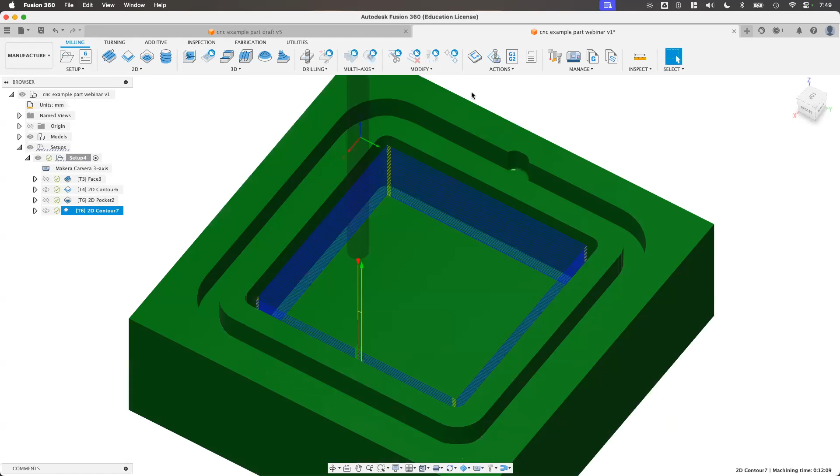And again, I'm going to enable multiple depths. You can see this is getting rather repetitive, and I find these settings that work for me, and then I just use them for almost every job. I might have to do fine detail and things like that for different precision, but in general I find that these are just really good practices.

So let's see, when I go to machine this, we can now see that my corner, it's still not perfect, right? This bit still might be a little big. I might have to use a slightly smaller bit, but we can see how much closer we are - this is much closer than I was before. Really, I might need to use like a 2 millimeter bit.

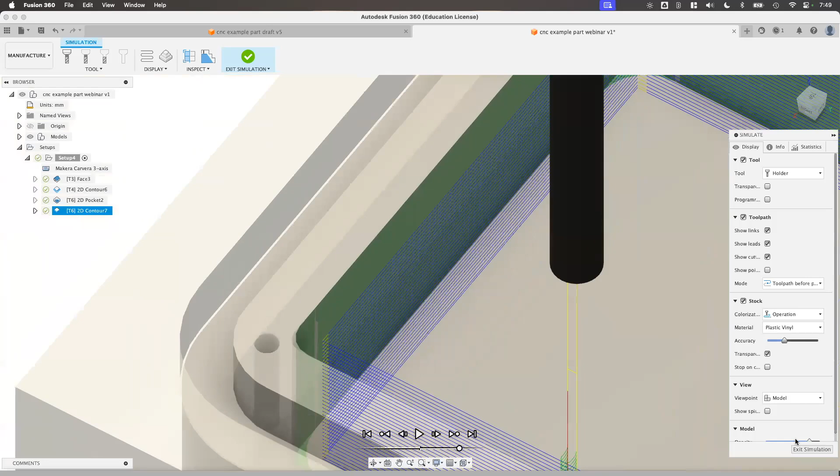And the cool thing is I can just go back into this toolpath and change my bit. Let's see if I have a smaller bit somewhere around here in my library. Let's see, this is a 1 millimeter bit. Here we go, a 2.5 millimeter bit - that's a little bit smaller.

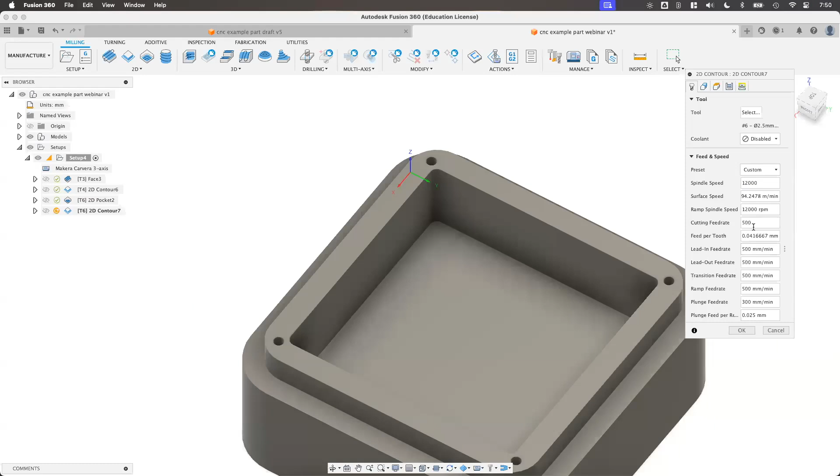I don't have aluminum set up for this, but that's okay, for now I'll just leave it. I'm going to manually punch in our numbers because I don't have a profile. So I'm just going to manually punch in all my feeds and speeds that I was using for my other bits, and I press OK.

And if I simulate this one, let's see if we can get a little bit closer to our corners. Yeah, there we go, we're pretty much spot on, right? So you might have to play with this and find your different bits and get this to line up.

Now here's something interesting. You'll notice next to my bits it says T, tool 6, whatever it might be. This is the assignment of my tool. Now I have two different tools here, a 6.35 mil and a 2.5 mil, but they're both assigned to tool slot 6, and that would be bad because we need to change between tools when machining. Depending on the type of mill you have, the machine might pause and ask you to load a different bit, saying insert tool 3, insert tool 4, and you'd have to know which tools those are. Or you might have a machine with an automatic tool changer.

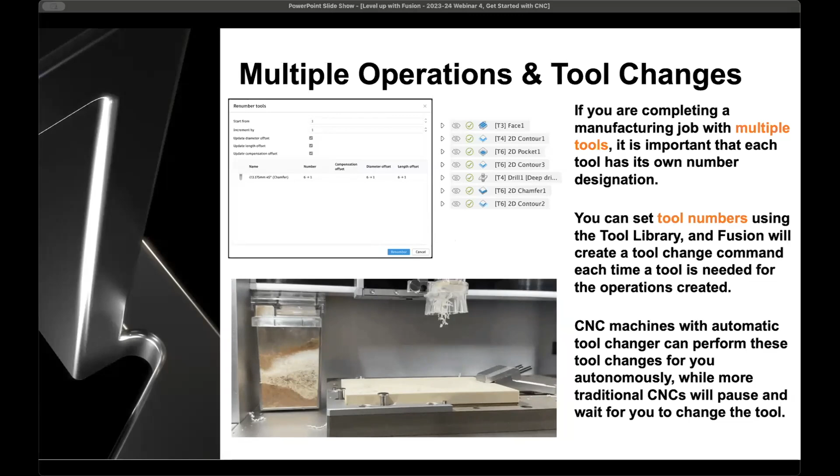I'm just going to switch back to the PowerPoint real quick because I have a nice little graphic. This machine, somebody asked earlier, is called the Makera Carvera. It's a really capable machine that can do a lot of things, one of my favorites for schools specifically. It can actually switch between the bits. So if I assign this tool 6, it would go over to the tool changer and pick up tool 6 for me. There's a lot of machines that can do tool changing, most at a higher price point, but this one in particular is a really affordable machine.

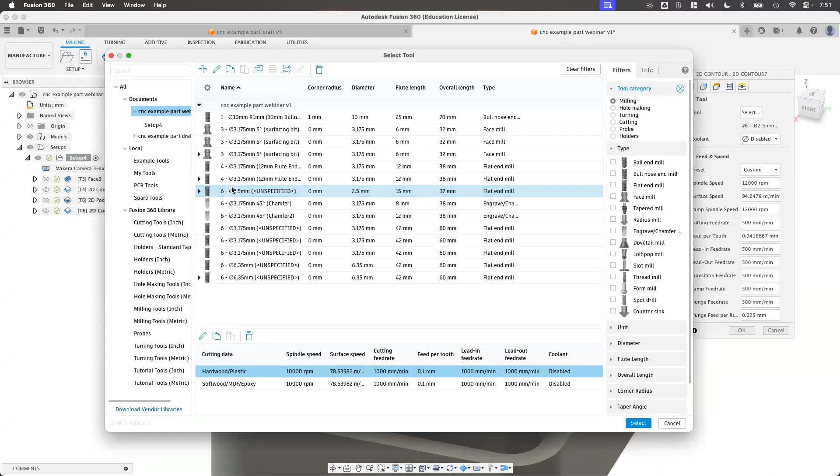But nonetheless, we can program those tool changes in Fusion. Right here I have two different tools, but they're both assigned tool 6. What do we do? Well, I want to go into my tool library and renumber this tool. I can see I'm using 3, 4, and 6, so let's reassign this to tool number 1. If I reassign this and press OK, we can see that I have tool 1 for this. So my machine would grab a different tool, or even without a tool changer, it would pause and wait.

So we're almost out of time, but we have 2 more paths, and I think we're going to be able to make it. We're going to do a drilling function. I'm going to select drill, and select a drill bit, which was automatically selected, super convenient. This is a 1.5 millimeter drill bit. I have aluminum set up, which is great, and you can see I have 4 holes.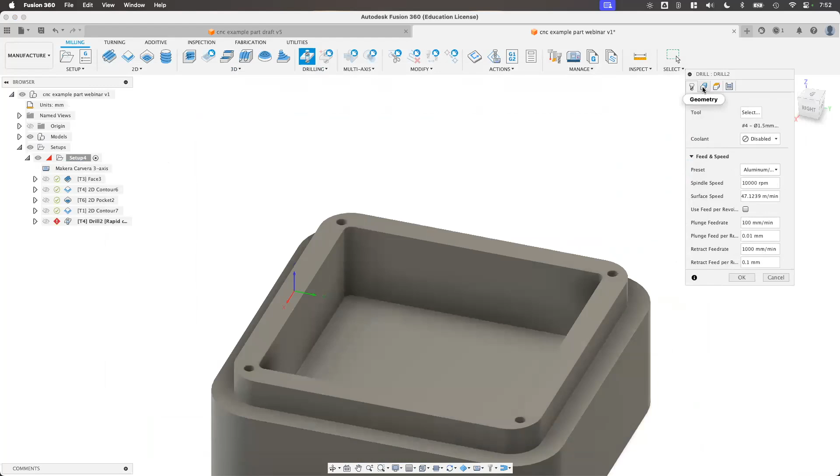So I'm going to select my hole faces, and if I hover over them, you can see I have these little paths like this. I'm going to adjust my heights, and interestingly, my top height is going to be the hole top. The bottom is going to be the hole bottom, but you have some options here.

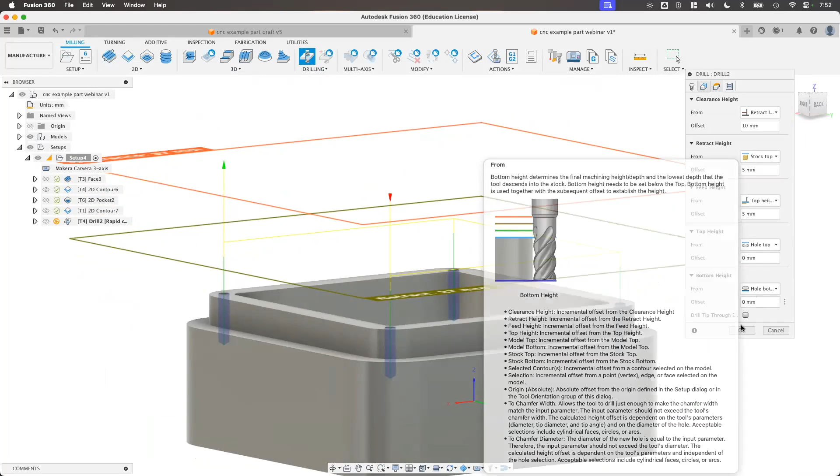Do you want the drill tip to emerge through the bottom, right? Do you want to plunge all the way through? Do you want to offset a little bit deeper? Let's say you're trying to cut through material, and the material might be a little warped—do you want to plunge all the way through the material? You can adjust those.

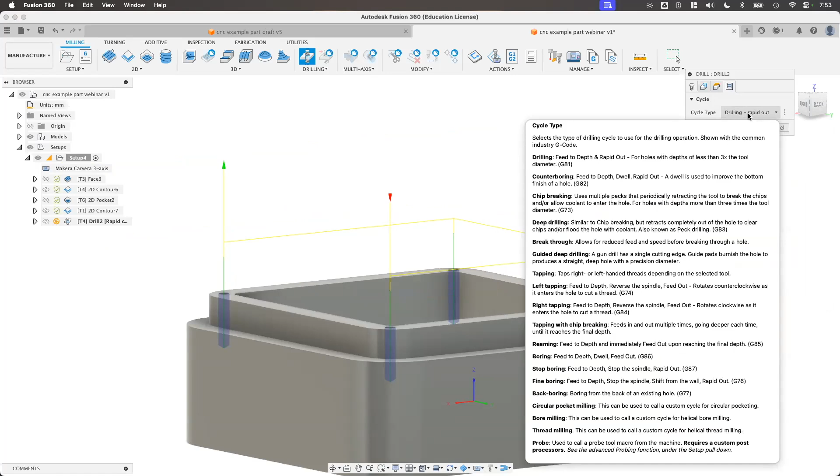What you really need to think about is the drilling cycle. The default is rapid, which means it's kind of like a drill press and you just go straight down really fast. That's a very quick way to snap your drill bits, especially if you're working with a harder material like metal.

So what you probably want to do is what's called chip breaking or deep drilling, which does pecking or retracting. After it drills, it actually lifts out of the hole, lets the chips evacuate, keeps my bit nice and sharp, and drills gradually. That's something you definitely want to enable. If you want, you can even put a pause, called dwelling, so it waits a minute before going back in, giving you a chance to cool the bit down. Aluminum's not that big of a deal, but if I was doing titanium or steel or harder metal, I'd definitely want to consider that, doing this as slow as possible to keep my bits sharp.

And then if I go to simulate this, we'll see—let me slow that down. Okay, not that slow, let me find a happy medium here. My drill bit drills and it pecks, drilling it gradually as we go to keep our bit nice and sharp and evacuate the chips.

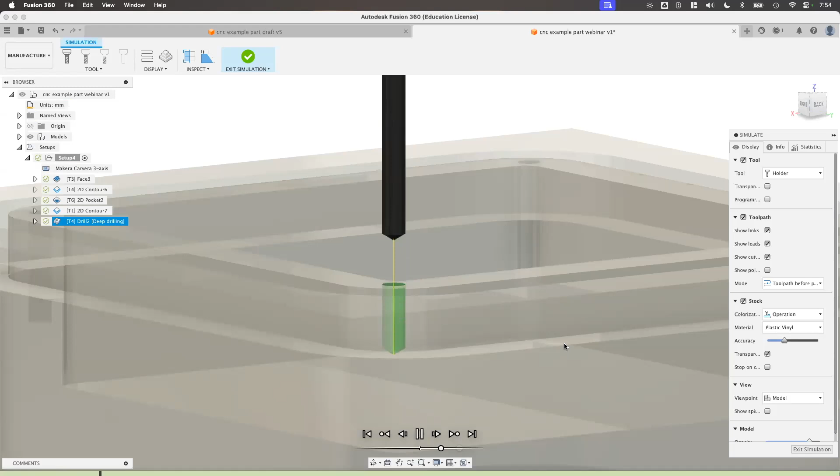Okay, and now I can see I have a conflict here. My drill bit's assigned to tool 4, but I already have a bit assigned to tool 4. Can't have that, right? That would cause a conflict and an issue. So I'm going to renumber this—let's move this to tool 2.

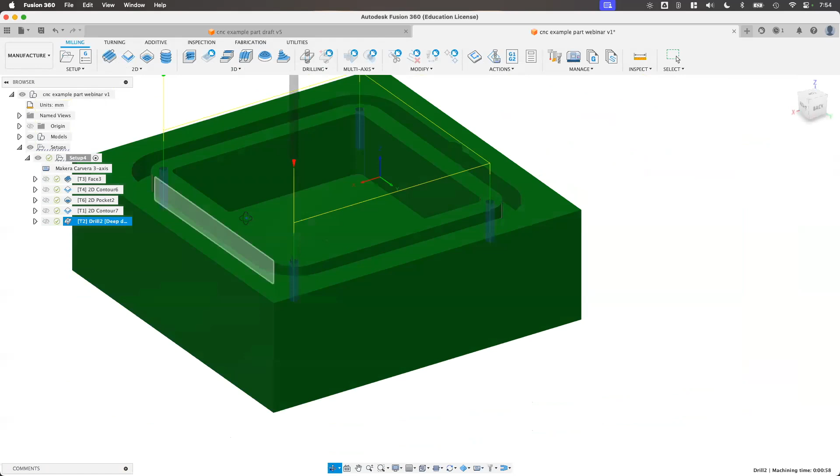All right, so that's nice and cool. And then the last thing we need is we got to cut this part out, right? We have our part machined, but I need to cut it. And that's actually going to be a contour cut, which we used earlier.

For this, I'm going to use the same really long 3.175 drill bit that I used earlier. So I can actually go into the bits that I've already used, right? I can see that I've already used this one. It's already assigned to tool 4. I already have my settings. I'm going to select the bottom edge of my part like this.

And now this is where tabs come into play. So when this part's cut, what's holding it in place? Nothing. And it could evacuate and fly out of your machine. And if your machine's not enclosed, that could be a huge hazard. It could cause damage to your machine. So tabs add little tabs that can be cut off.

And Fusion will automatically draw them. You can set by the number of tabs you want, by the distance of tabs you want. You can also draw them manually. So I might say 0 tabs, and then I might manually put a tab here, 1 here, and 1 here. You can adjust the size of the tabs if you'd like. You can make them bigger, thicker, wider, whatever it might be, smaller.

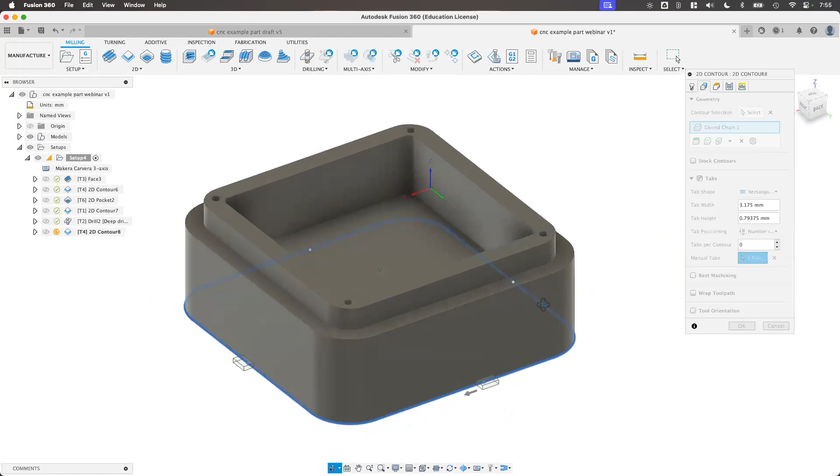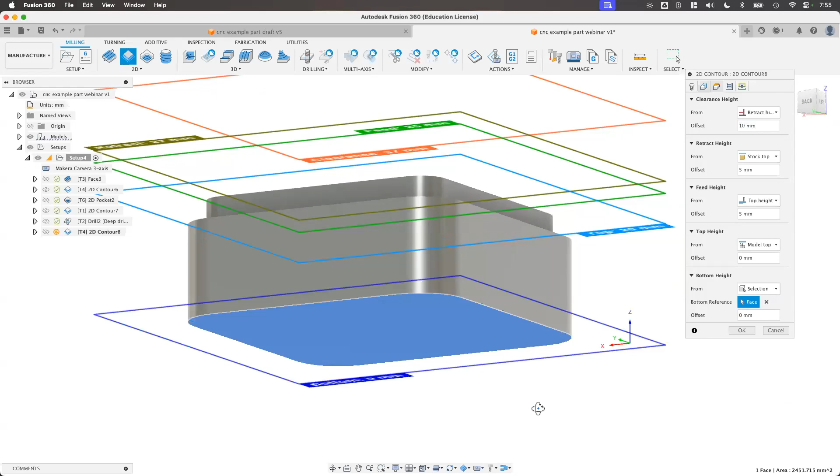And again, you would cut those with a handsaw or something after it was done. I'm going to set my offsets to be exactly the same. Model top. This one's going to be model bottom. If I wanted to cut all the way through, I could, right? So I could plunge all the way through. And sometimes I even actually like to say selection and just say this and set the selection like that, so I know exactly where it's going to end.

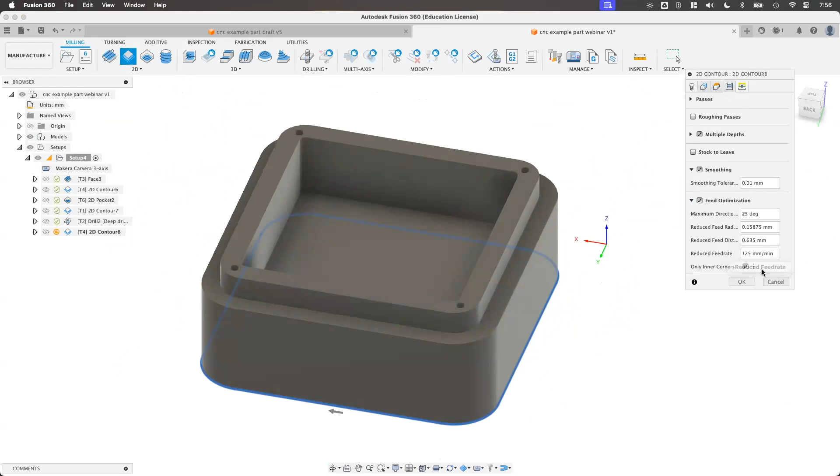We're going to add our multiple depths, especially since this is going to be a lot of cutting. So I'm going to cut this nice and gradually. I'm going to enable even step downs and finishing only at final to save some time. And I'm going to enable smoothing and feed optimization like we did before. And when we press OK, we see our most complicated toolpath to date, but we also see this cut all the way through.

And what I'm going to do now is I'm going to click away and I'm going to hit simulate with nothing selected. And I'm going to speed this up here. But this will simulate the entire process, the surfacing, the pockets. Okay, I can go a little bit slower. This will machine it. We can see the surfacing, the pocket cutting, the milling, right? Then the drilling, and I can inspect this whole process here before I send this to my machine.

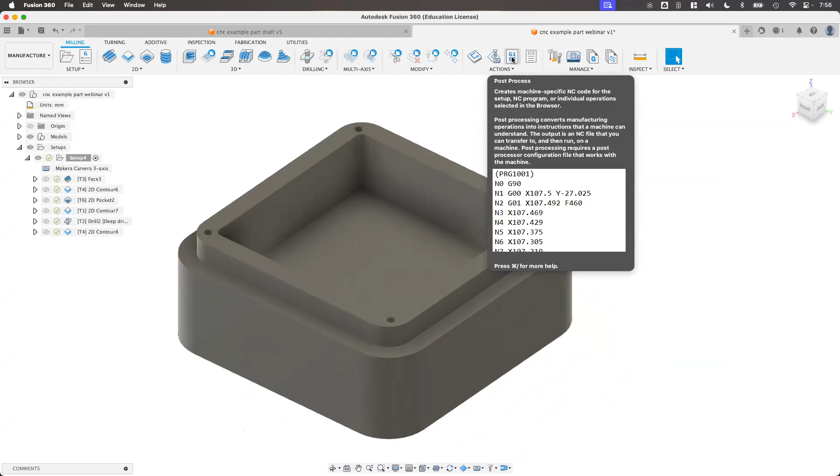And now you might be thinking, okay, how do we get it to the machine? Well, that is called post-processing. So right here, we have this post-process button, and this is what generates a G-code file that we send to your machine. So let me pull this window. It just popped up on my other screen. Here we go. All right.

It's super important that you process it using your machine. So I'm using my Carvera profile. I can name this, so I can call this like mold part. Whatever your machine runs in, most machines would run in millimeters, even if you design in inches. I want to make sure I export in that unit.

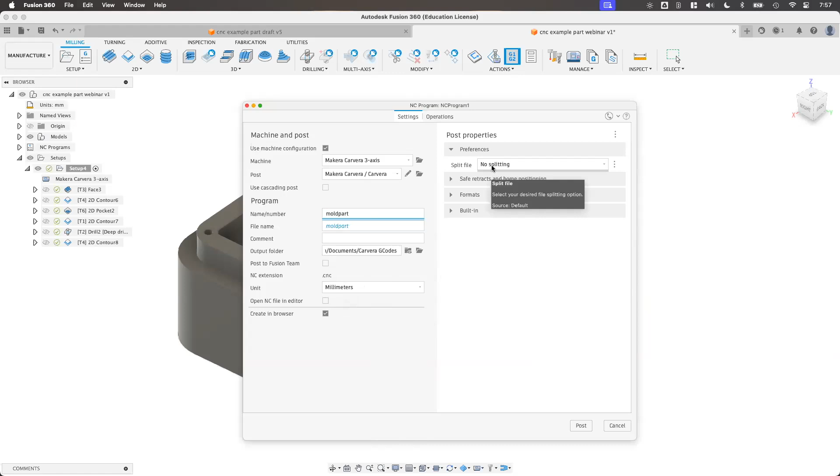If I want to split this into multiple files, let's say, for example, I want to do the first 3 toolpaths and then flip, I can split this into multiple files rather than one. And then I also want to enable whatever pockets or processes or operations I want to do. So I want to do everything. But let's say I'm going back and I just want to drill my holes a little bit bigger. I might disable everything but drilling and just send just that, right? So you don't have to send them all, but you can.

And when I hit post, a little G-code file is saved, and I can then upload that to my machine, however your machine works, right? So listen, we just covered a ton of stuff super quickly.

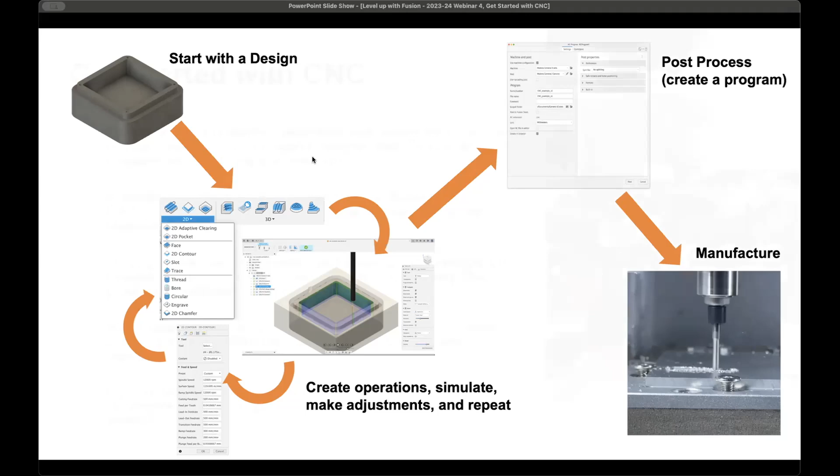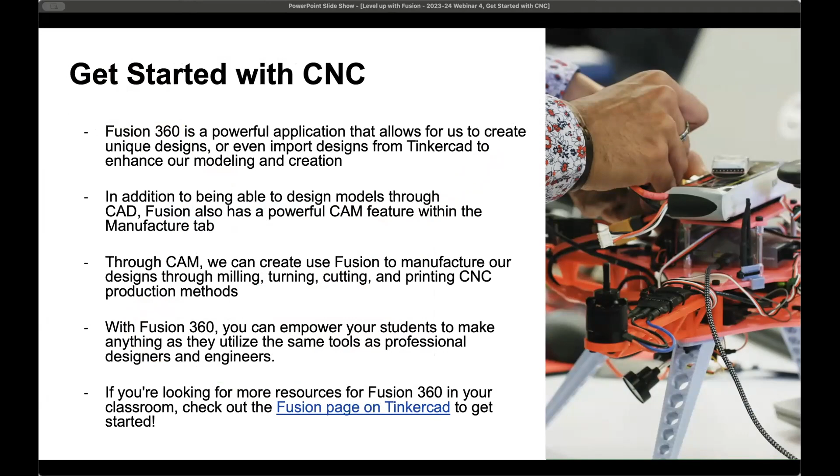Listen, I'm cutting this one a little close, so I'm going to go through the last bit quickly here. Again, reminding you that CNC is a super diverse area, and Fusion offers the tools and capabilities to allow you to do just about anything from subtractive, additive, even formative, whether you're using a turning process, a cutting process—really a ton of different resources in Fusion.

If you want to step up your Fusion skills, or also allow your students to build their resumes, there are official Fusion 360 certifications. There's ones also specifically for CNC, CAM, and manufacturing provided by Autodesk, which is a great real-world learning experience.